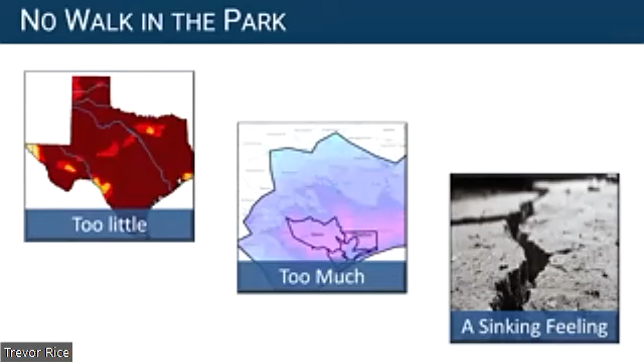Supplies, and then a lot of the state agencies and state programs are already taking the steps to make sure that we're ready to meet that future and meet those water needs. So for a lot of my presentation, I'd like to just highlight a few of the major efforts that are going on in this area.

There are a lot of similar efforts across the state to meet needs in those regions as well, but we do have some specific concerns here.

One of the major planning efforts that goes on here that doesn't go on other places is carried out by the two subsidence districts, the Harris-Galveston Subsidence District and the Fort Bend Subsidence District, to halt subsidence in essentially the greater Houston area, which they've done through a combination of science-driven regulation, but also education and outreach.

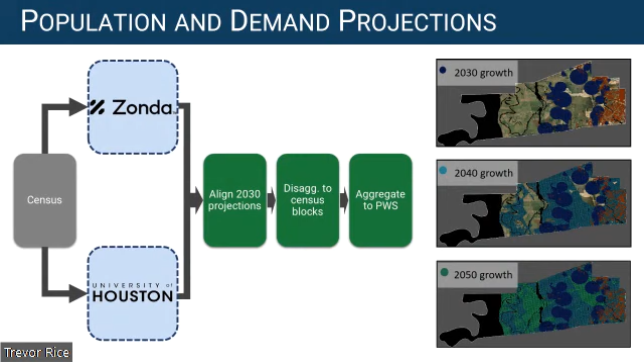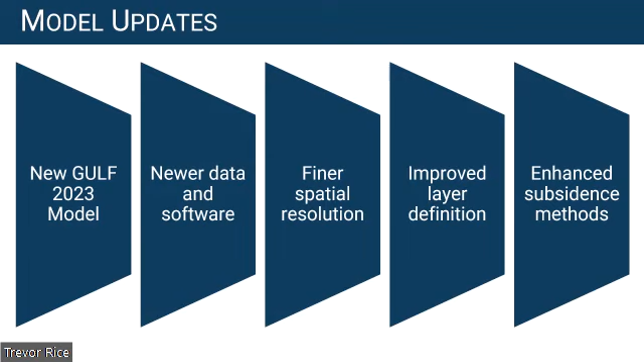And those have already been leveraged by a number of other planning processes in the area. They've also been working to help the long-term planning of this area to update the groundwater models - finer spatial resolution, better definition of the different groundwater layers and the newer science since the last models came out, and enhancing the ability of those models to represent the subsidence impacts of groundwater production.

And from that, they're going to be evaluating different scenarios, looking at how those combinations of supplies, demands, and the groundwater impacts could possibly play out, to see if they need to adjust their regulations, which drives so much of the infrastructure and supply development in this area. And I promise at some point I'm going to quit hitting that pad and bringing that up.

Now, staying on the topic of groundwater for just a moment, in addition to the subsidence districts, this area has a number of groundwater conservation districts that do their individual long-range planning, but they also get together in a state water development board's sponsored process called the groundwater management area process.

In addition to their own long-term planning, they get together and try to look at, from a regional perspective, what are reasonable goals for the future of the aquifers here in terms of things like how much drawdown do we want to allow over the next 50 years, or how much additional subsidence is tolerable over the next 50 years, and look at modeling to see what is a sustainable amount of groundwater production that does not exceed those goals. So that we want to continue using groundwater as a resource where it's appropriate, but we don't want to use it up or sink ourselves into the earth.

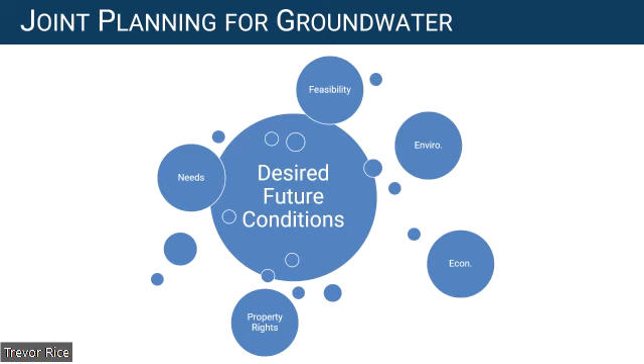So they're doing a lot of work to say, where can we safely go in the future? And both of these processes feed into the state and regional water planning process.

This is a process that came about in roughly 1998, 1999. The first plans came out in 2001 to allow the state water planning process to leverage more of the local knowledge, local expertise. So the state was divided into 16 regions. Each of those regions develops long-range regional plans that look out 50 years, and those are revisited every 5 years because the state's growing fast and it's a moving target.

And fundamentally, this planning process that covers the whole state in these regions is pretty simple. The devil's in the details.

They're 2,400-page reports, but you can summarize the key points in this one little flow chart. You're looking at a repeat of drought of record conditions, a dry year, and asking what would your water demand be? Looking at populations, growth in industry in the future, agriculture, power generation, 40 to 50 years from now, based on that growth, if we were hit by the repeated drought of record, how much water would we need?

And then under similar dry conditions, how much would we have and be able to deliver that day? Combining those two, we're able to identify the projected needs and then start looking at strategies and projects that have been recommended by water providers, by industries, by cities, and then look for where there are gaps and analyze those to make recommendations.

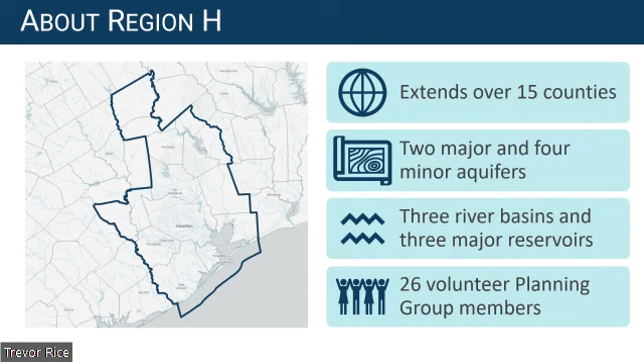The region we're in now along the upper Texas Gulf Coast and the greater Houston area is called Region H, which runs all the way down from Brazoria County up to Madison, Leon counties, and covers all or part of about 15 counties, a couple of aquifers, and parts of the Brazos, San Jacinto, and Trinity River Basin. We're made up of 26 all-volunteer planning group members covering a dozen different interest categories. So it's a very broad perspective.

Now, the latest numbers that just came out about a month ago from the process show the latest water demand projections. You can see it's driven largely by municipal there in blue, and then industrial there in that kind of goldish yellow color. So nothing to sneeze at, 2.5 to about 3 million acre feet.

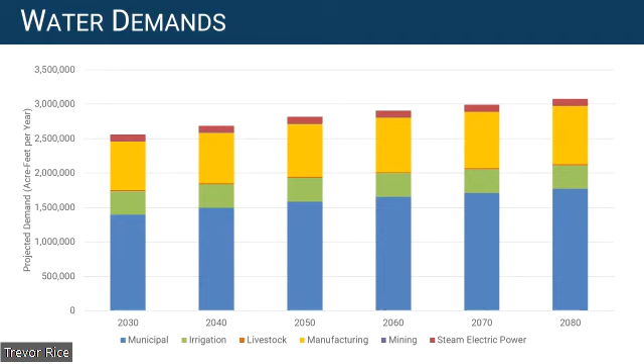And for those that aren't used to working with acre feet, that's 325,851 gallons. It's basically a football field, end zone to end zone, a foot deep.

The other challenge is, even if somebody's got the water, it may not necessarily be where the needs are. So there may be work in the future to develop new projects, to build new pipelines to get it from who has it to who still needs it. So it's not just simply adding and subtracting. There's a lot of looking down at the individual entity level.

And when we make that comparison, we're looking at nearly 400,000 acre feet of need in 2030. Now that grows up to nearly 800,000. Now that's not doom and gloom. And there's a reason in regional planning we say need and not shortage, because it's only a shortage if nobody does anything about it, and a lot of entities are already working on this.

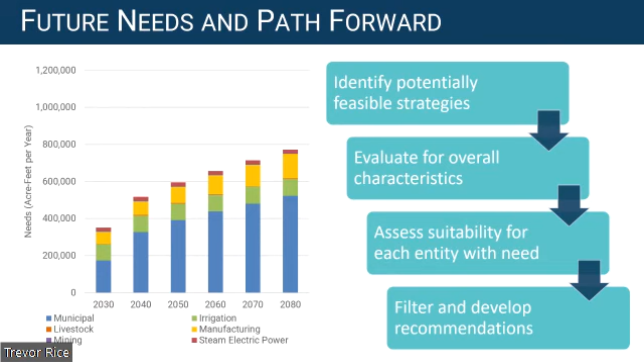So a lot of what you see there in 2030, things are already going in the ground, pipes are going in the ground, people are implementing conservation programs to make that a reality. So it's not as scary as it looks, but it is an indicator that we can't just let things run wild. And so once we have these needs, the planning group looks at those plans that are out there, looks at where there are gaps, and makes recommendations on potential strategies for the future. A lot of those are infrastructure, but not all.

And one thing that the Region H Water Planning Group and a number of planning groups recommend is advanced water conservation and loss reduction. So not all the solutions are structural. Now, conservation and loss mitigation are certainly not free, but when you think about the fact that you're saving water, the equivalent of water treated at the tap versus having to build a reservoir, a river intake, and a treatment plant, and a new pipeline, it certainly is a lot cheaper in comparison to developing something from source to somebody's kitchen sink.

One of the areas that there's a lot of potential that sometimes gets forgotten about is in leakage losses. The Texas Water Development Board collects data every year, surveying systems to figure out how much water they're taking in, how much is getting billed, how much is lost to meter errors, and how much is just getting wasted into the ground.

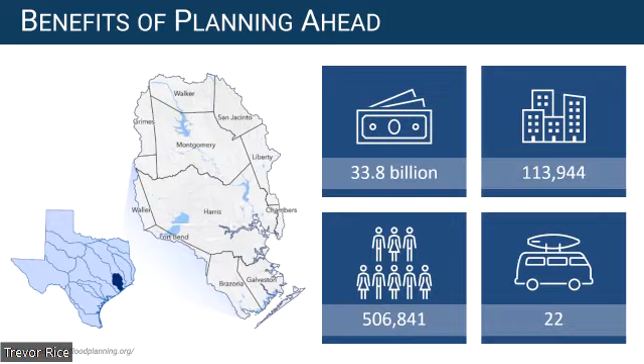Now, one thing that all of the processes I've been talking about have in common is they're all looking out over long windows, typically 30, 40, 50 years. The reason for that is simply that to implement these things, you've got to get out ahead of them. The solutions to a lot of these problems - some can be implemented quickly, some take decades. That's the reason all of these processes that communicate with each other, both in this region, in the state, and the other regions around the state, have to take such a long look.

That can be particularly frustrating at times for industry, because industry is fairly agile and water supply is not. Most providers just cannot move at the speed of industry. They're not trying to be difficult, I promise they're doing the best they can, but they just do not have that kind of agility. So it can be quite frustrating at times for industry to try to procure water supply.

Industry has some other issues that other segments like municipal don't face. Municipal, when it grows, tends to grow with nice smooth curves over time, even when there's booming growth. Industry often is unit-based or facility-based. When you have another demand, you're not building a tenth or a hundredth of the facility each year. You're building a facility—it's there, it's not, and it needs the water.

At the same time, when things get a little tight, it's awful hard when somebody comes to you and says, can you cut your water usage back 3%? It can be on or off—in some cases you can, some cases you can't—but a lot of times things have to be on or off. So industry faces some extra challenges that other demand sectors don't in dealing with supply.

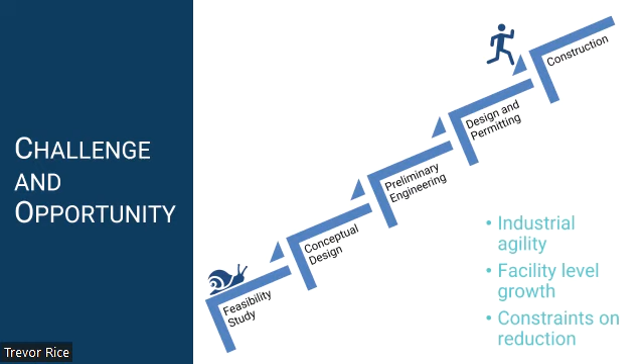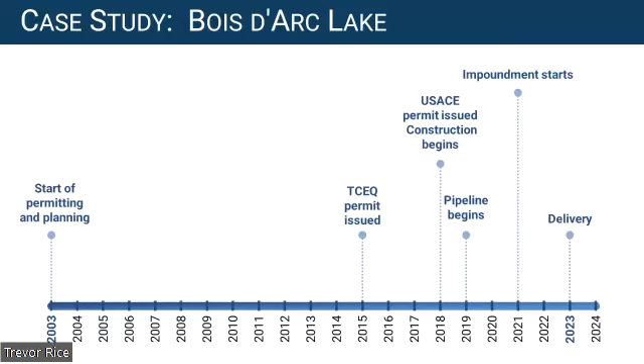When we talk about lead time, a good example—and I know we've got some folks in the room who work in the North Texas area and are familiar with this—is the Bois d'Arc Lake project, the first major reservoir built in Texas in, I believe, decades. Perhaps the fastest modern reservoir we've seen. This was fast-tracked. This was everything going perfectly.

For a major water supply project, everything going perfectly—let me put that in context. When this project started, all the young folk were into this hip new thing called MySpace. When the project started delivering water, we were at the point where we were scared the machines might actually be taking over. That's how long it takes to develop a quick project.

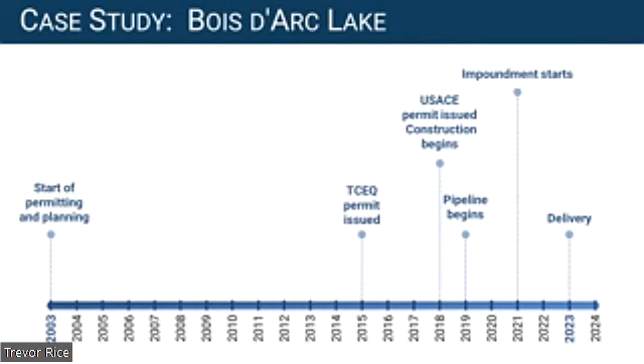That's why all these processes look out so long. One of the advantages this region has had in industrial water supply is that, probably more so than any other region I've seen, industrial entities here communicate with their providers clearly and try to give them lead time. That varies by region, but in this area, the relationship between industrial entities and providers is very close relative to some other areas.

That's been a huge benefit for giving those providers the lead time to get that water there when it's needed. So that ongoing communication will be vital as industry in this area grows—and it's certainly continuing to grow. Whenever there are opportunities for expanded lead times, those certainly help the providers. They understand that for certain industries there are issues of proprietary information, but wherever possible, they need as much lead time as they can get.

Another opportunity out there is that a lot of the processes we've talked about today are very open—they're all public processes, open to stakeholder input from all sectors. In our regional planning group, we have quite a few industrial representatives from different sectors, both on our planning group and in the audience.

That's been super helpful for the region in understanding what the future is for industry, and not just having folks like me—who have a background in ag—trying to guess what the next thing in chemicals is going to be. That's been remarkably helpful for this region, and we highly encourage everyone who can to get involved with that and give their feedback.

There's also sewage overflows that happen from water leaks, and we've had sewage overflows in the Houston area, for example. The leaks do make water more expensive to supply because they're treating that water, or if it's municipal drinking water, they're treating it and then losing it. That's an asset they are not getting reimbursed for. If a water system has expensive supplies they're trying to develop and they're getting more expensive because of those leaks, they also pass that on to the customers, making it more expensive for them as well. So that can be an equity issue too.

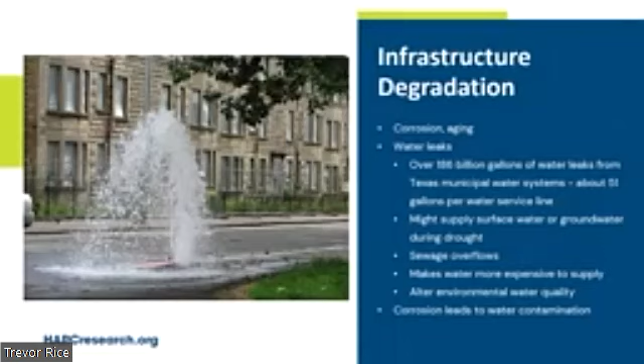And it can also alter environmental quality, regardless of if it's drinking water quality or wastewater. That's a different water quality than what's in the environment, and there could be other things that are in that water, for example, pharmaceuticals or something like that.

Next on our list is water access, and we are thinking of water access as plumbing access. It could also just be the water supply access, water supply issues that were mentioned before.

About 44,000 houses in Texas still lack access to plumbing. That's not a big percentage of the state, but that is a significant need for a lot of people.

There's also insecure access to drinking water and sometimes wastewater services in underserved communities throughout the state. That can be colonias in South Texas or other parts of the state, unincorporated communities, folks in insecure housing situations, folks in mobile homes, folks in rural areas. All of those can have a higher likelihood of having insecure access to water.

It also happens when there's historic disenfranchisement in the area, where folks are less likely to have been, or there's a historic situation where they were not involved in the decision-making for the water system. For example, the lines were drawn to specifically exclude a certain population group or something like that.

This is an issue obviously directly because they don't have access to water, but then it can also push those folks to seek unsafe water sources, bottled water, more expensive water sources, things like that.

We also have drought planning. In the state and regional water plans mentioned before, they're highly encouraged to consider droughts in that plan. The graphic here is from the 2011 drought, and you can see the intensity we experienced in the state from that event. That's not our drought of record though—it's actually a 1950s drought, which was longer and more intense, and that's what's used for water planning now.

In our drought planning we consider drought response, existing water supplies and needs, future water demands, future management strategies and conservation efforts, and financing needs. That's generally what was already described.

There is a public input process within those stakeholder groups. They're not prioritizing certain members of the public—it's the public generally, which from an equity perspective might privilege those who can be part of the process versus those who are most affected by water issues.

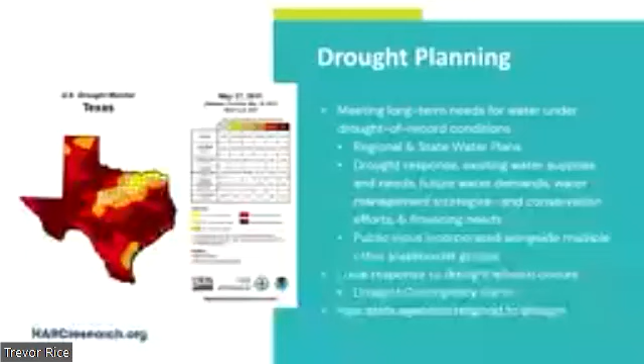There's also local drought planning, drought contingency plans at the local level that do some of this work as well. And then we also have how states respond to drought, with the Texas Division of Emergency Management doing a lot of the legwork there.

We also have flood planning, which was mentioned earlier. We rely on the Federal Emergency Management Agency for flood maps and the National Flood Insurance Program. We rank very highly in flood risk disclosure—one of the top 3 states for that. So another win for Texas. Good job, guys, I assume it was y'all.

We also have the Texas Flood Infrastructure Fund, a funding source attached to the flood planning process mentioned earlier. Projects that are part of that planning process could be funded through the Texas Flood Infrastructure Fund. All of that was a legislative response to Harvey—the Texas legislature put those together after the big event we experienced in 2017.

On the equity side of things, while we have these success stories in flood planning and more recently in flood disclosure, access to information, access to insurance, and access to mitigation and disaster recovery funds is still highly inequitable in who gets that benefit.

On the climate adaptation planning front, we don't have a statewide climate plan. We also effectively don't consider climate in the state water plan process. From the state's perspective, regional plans can consider climate, and quite a lot of them do. Region H does, yes, a little. Region K, the Austin area, is I think the most likely to do that, and San Antonio's area does as well. There's about 5 or 6 of them that do.

Another area we consider in our paper is transboundary waters—the Rio Grande that separates Texas from Mexico. There's a 1944 water treaty governing that river, where Mexico must deliver 350,000 acre feet—a football field one foot deep—on a 5-year water cycle. It used to be that this often happened during floods, when they had a lot of water and we would get that extra water. We do allow for a water debt during drought, and Mexico has been unable to fulfill that debt or reach the needed supply with us 3 times since 1992.

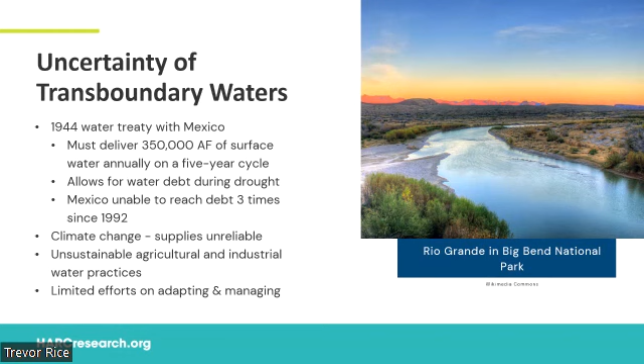That treaty was obviously written in 1944, and then, as I mentioned before, we had a water rights adjudication process on that river because it is so stressed. Climate change since then has also made supplies very unreliable, so we do have drought and flood to deal with. The process does make it relatively unsustainable for agricultural and industrial water practices on that river to be able to predict the supplies they're going to have to do the processes and practices that they have. There's also limited efforts on adapting and managing water on the river as well.

So we consider some challenges and opportunities in sustainability and equity. These are major sustainability efforts that are already underway, and we're evaluating how they incorporate or don't incorporate equity in their water management.

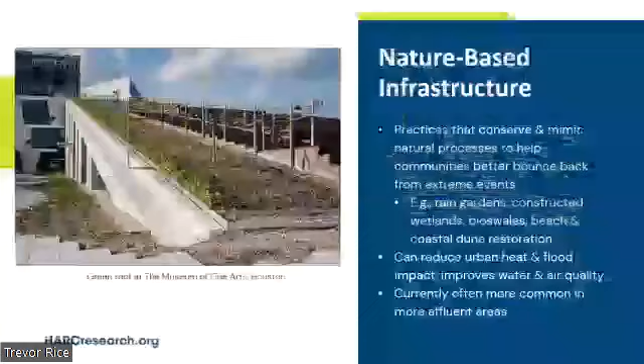The first is nature-based infrastructure, and this would be practices that conserve or copy how natural processes already do the work of water quality restoration or flood mitigation. So taking that process and copying it, making it work for a community. It can be used for resilience to help communities better bounce back from extreme events.

Examples of that would be the green roof at the Museum of Fine Arts in Houston, but also rain gardens, constructed wetlands, bioswales, beaches and coastal dune restoration, lots of different examples of how that's used in practice. The great thing about these nature-based solutions is that they can help reduce urban heat, help with air quality, help with water quality, help reduce flooding. There's a lot of co-benefits with these practices. They also tend to be relatively nice looking because they're greenery and it's nice to have that around.

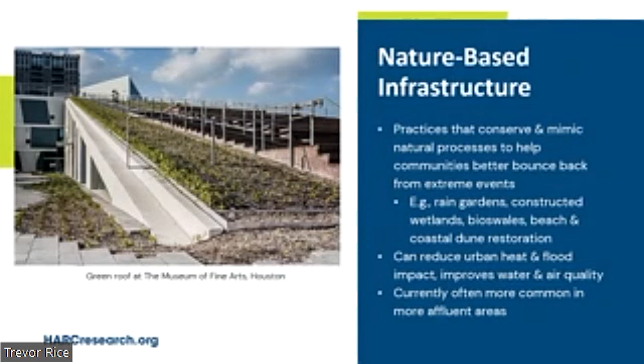However, they're also more commonly applied in more affluent communities. We'll see less of that in underserved areas, which contributes to the things I've mentioned before, where we have more flooding issues in those areas, poorer drainage, water quality issues, things like that. So that's a challenge to this practice, that we often see it in more affluent areas, an opportunity being all of the co-benefits that it does provide and being able to apply it in more areas of Houston, the Harris County area, Region H, and Texas broadly.

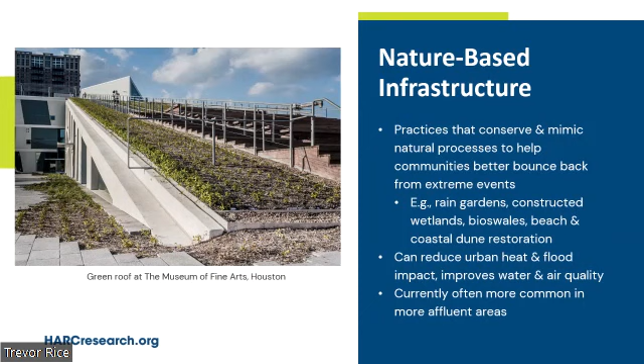We also look at One Water, which is a philosophy that all water has value, and we can think of it all together. It's not drinking water and wastewater and surface water and groundwater, it's one water. Stormwater, seawater, any of those things. It also accounts for water quantity and quality together. It's a unified planning process, ideally for long-term resilience, because you are thinking of all of those things together.

There are communities that are already considering this, for example, Austin or New Braunfels. There is an emphasis on engaging a wide variety of stakeholders in that process, including people from underserved communities. That is an opportunity for this. A challenge being, it's still a challenge to make sure that they are included, that they are engaged, and they are prioritized in water planning processes, especially when they're impacted by decisions.

So our recommendations from this process are that there should be equity in spending government funds at the local, regional, state, and federal level. For example, in the federal process, there's currently a Justice 40 mandate, for the Infrastructure Investment and Jobs Act and the Inflation Reduction Act. Justice 40, just for reference, is a requirement that 40% of the benefits of that government spending flow to disadvantaged communities. The definition of what counts as a benefit is still up in the air, but it's at least a movement towards trying to make sure that the folks who have been historically left out of planning processes, infrastructure investment, or the benefits from new projects, for example, hydrogen that's been mentioned a few times, those folks are actually receiving a benefit from those activities.

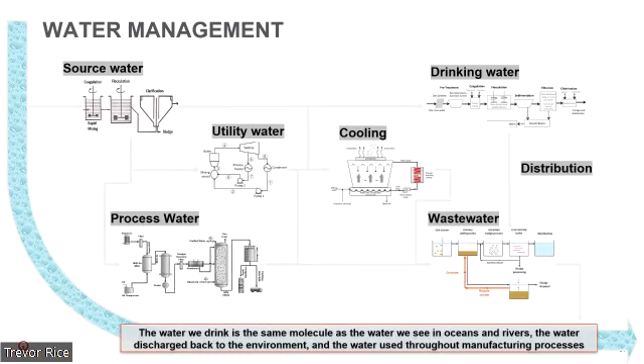So the two big things I want you to take away, if you stop listening now, is, alright, that water must be fit for purpose. What is that purpose, and how do we understand what the quality goals are and how we can get to that? Because the technologies are available to do that treatment, the technologies are available to do that measurement, but we need to have that target available so we know what we're working towards.

And then that other thing is, okay, we have those tools so that now we can set those targets. We can set our KPIs for efficiency, for compliance, for quality, and by having that data, we can then use that to drive our decisions.

So we say all of that with things changing, and we have various challenges. We've got a slew of climate challenges, from flooding to drought. We might have good quality, so then what do we do with things like new regulations, contaminants? Just because we can measure it, do we know that effect on human health and the environment? How do we quantify that?

How do we enable things like reclaim and reuse and recycling of that? How do we have better desal opportunities? It's there, it's available, but it hasn't really taken off yet because of the costs. And then how do we make sure that our wastewater discharge is of the quality that it should be to not affect the environment, and then the next person that's taking that water out further down the river?

We have all of that with a shift in market. We have shifting workforce—COVID's affected a lot. We have different generations coming in that have different expectations, even of what work means to them. All the while, we're still managing supply chain constraints and starting to steady out a little bit there, but in our business some people have gone out of business, or some markets are just higher than they were before, some parts aren't available to access.

So I've got a couple examples now of what a refinery water balance might look like, what a chemical water balance might look like, and then we'll get into how we affect regulations and sustainability. But here's just a couple ways. There are all these different water uses at a plant, and all these different water discharges, of different qualities.

If we have certain treatment and the location is right, maybe we can repurpose this discharge to actually use for one of the water uses, or one of our purposes used. We say that because we look at these numbers at the bottom. Some of this research I mentioned is from Bluefield Research, a really good source for what's happening in different water markets. We use a significant amount of water, and we discharge a significant amount of water.

I'm not going to get too deep into the numbers here, but we use more water than we make of product, and that's pretty consistent across industries. We also have water that we take in as our initial makeup water, and the majority, at least of our refineries here, are using surface water.

That surface water quality can be variable. In some cases we might be taking water in from a river that is worse quality than we are required to put back out into that river. That's an uneven situation for a plant to have. So if that plant could then, instead of discharging water of a better degree than they got it, reuse that for purpose inside the plant, maybe they could reduce the intake water they were previously required to take. This opens up the idea of how could we reuse that?

Some places are obviously using that through a steam system, different ways of reusing whatever that wastewater is, stormwater, rainwater here, correct, in Colorado, but how can we take those and then repurpose them?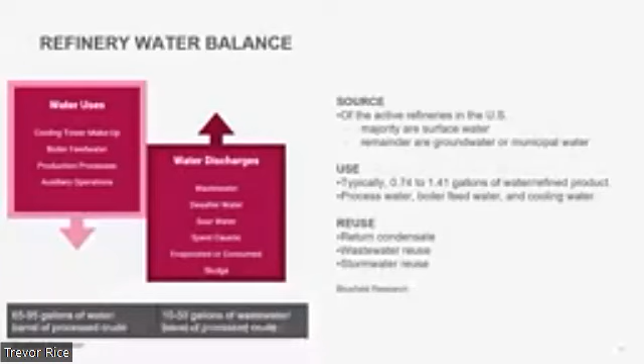Looking at it slightly differently, from a chemical plant side, we might have some different wastewater discharges. We also might have different water uses, perhaps more in the product itself, or within production processes.

Overall, if we look at the chemical industry, we know that organic chemicals are the most water intensive to make, ag chemicals are typically the least, and in between you use different sets of water. But that water spend isn't only the intake, it's also the recirculation, it's acquiring that water, where we're getting it, and then how much it costs us to even discharge that water back.

Right now we're in a scenario where water use and water management isn't a top priority. Even when we think about improvements, chemical plants are often more concerned about energy discharge, air emissions, and even plastics. So right now we're at an opportunity where we can start to think about planning and improving for the future and having water be a part of that, because it's not only from a brand reputation, but it's cost savings and process improvements that we could gain from that.

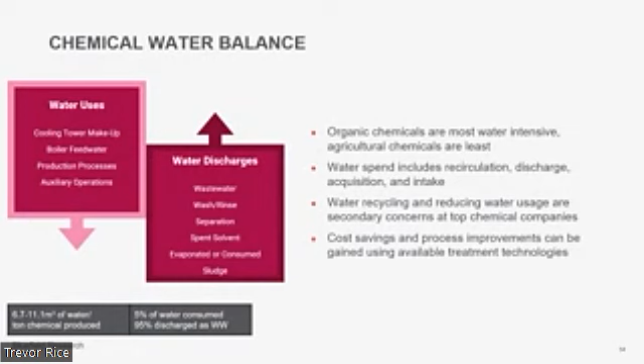So looking at the regulatory side, a lot of this is around discharge compliance. Just doing a quick Google search, I found very easily several headlines that pop up. So this isn't only an effect on possible degradation of the environment, it's degradation to the brand, it's additional costs, it's fines.

And so the thought behind this is if we are able to improve our discharge compliance, and then also get it to a point where instead of discharging that water, we can use it, now we know the quality is good, and we can avoid this kind of publicity and press. We can make sure that whatever we do discharge is going to improve the environment for the next person that's going to pull out of it.

When we think about the discharge, we've got a series of parameters that we've got to hit according to whatever NPDES permit we're looking at. Number one is probably looking at those toxic pollutants. How is that going to affect the environment? How could that affect human health? And then looking at nutrients, so your carbon, your nitrogen, your phosphates that can then degrade that environment itself.

But then also think about that water source. Eventually, that water molecule is going to become an intake to a drinking water source. So it's all tied together. And the more that we can improve that, the better we can not only comply with those limits, but we can improve the performance as well.

But then we think about, okay, well, that could be expensive to improve that treatment. It's often considered a cost center, whereas we can easily get funding for production process improvements, things within the plant, because that's usually what produces profit at the plant.

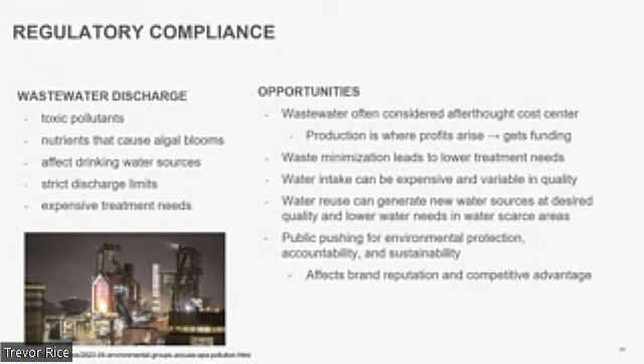So thinking now about, okay, how can we use reuse? We can possibly generate new ways of sourcing that throughout the facility and start to look at it from, okay, reducing our regulatory compliance issues, but maybe improving brand, improving that competitive advantage. If we're not one of these names, then that improves the business overall.

So then transitioning that into, okay, now we've got a lot of facilities looking at making and publishing their own sustainability goals. And through some research, it tends to be that more B2C customers or companies publish more of their water use and their water management plans than B2B. So we see a lot in like food and beverage, pharmaceutical, they publish a whole list of what they're doing from a sustainability standpoint. A little bit less on like power, mining, and some chemicals if they're going to another business.

But being Veolia and coming from a French company, I recently saw this corporate sustainability reporting directive. And so this is going to affect not only facilities and companies within France, but over 50,000 companies, even those outside of the EU. And all they're looking for right now is to report social and environmental risks. So every company is going to start to being required to do this. And well, this type of thing might not come to Texas, it might not come to US, at least companies that are multinational companies might have to start to record a lot of this information.

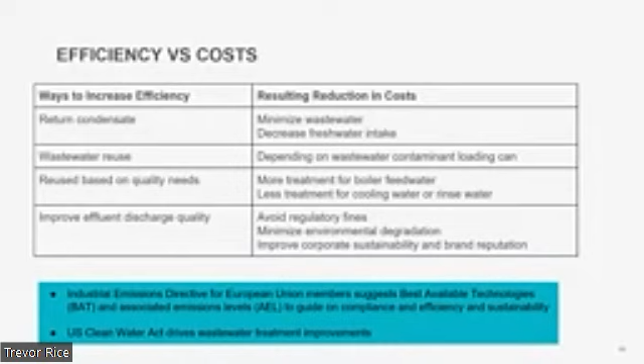So last bit on efficiency and opportunities from wastewater before we move on to how process monitoring can help: I was at an event recently in Colorado, an innovative water technology seminar, and most of the people there were talking about recovery of wastewater and what we could do with that.

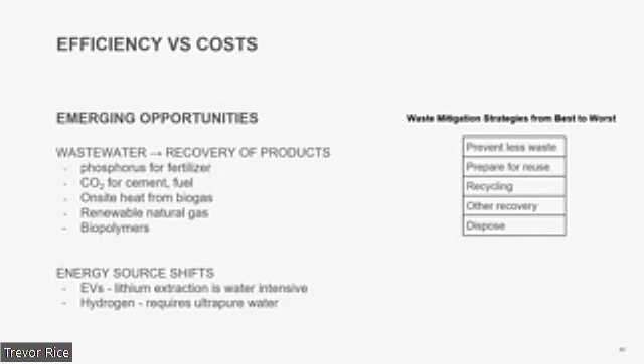Some of the ideas I noted down here: either capturing phosphorus from our wastewater, using the CO2 from say some anaerobic processes to make different kinds of cement, different kinds of fuel, using that as some kind of input, using that on-site heat maybe from biogas, or even making biopolymers from some of that wastewater we've got. So there's a recovery of products market from wastewater that we could gain.

And then we have to think about some of the questions from the first talk: how are these energy sources going to shift in terms of our water use? I thought those were really great questions. We know that hydrogen, at least right now, the technologies require very ultra pure water. How much energy, how much water go into making that versus what are we going to get in return? I think those are all really good questions.

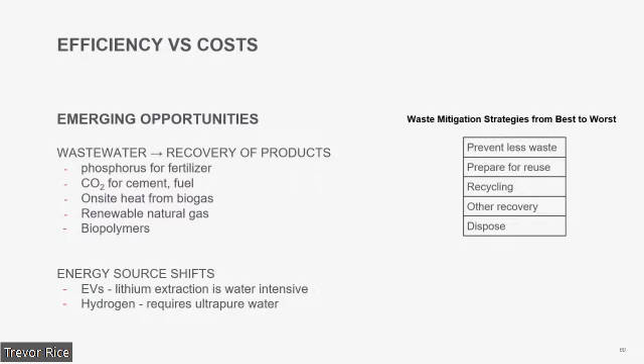But in general, the best way to mitigate our waste and our wastewater is to make less waste and then prepare for how we can reuse it. Think about how we could recycle it or recover it in other ways, with disposal being the least optimal case. But how do we really use this?

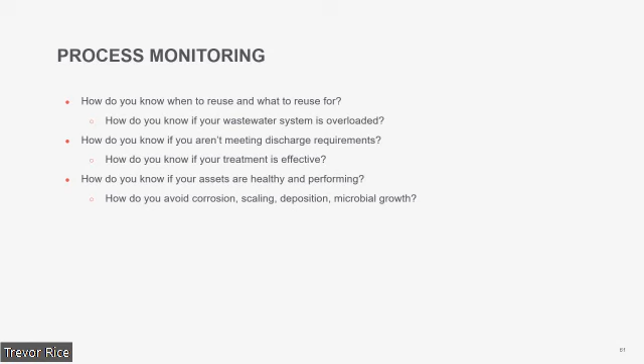Well, process monitoring comes into play when we want to ask these kinds of questions. Let's say we want to treat this water to some use. How do we know if it's good enough for that use? How do we know if the treatment's working? How do we know if the wastewater system is overloaded? How do we know if we're discharging in compliance? All these things are great questions that can be answered through better monitoring.

In the past, it's been very standard to just monitor at the point of exit and say, am I in compliance or am I not? Maybe those were done with a grab sample sent off, and we didn't really know for a couple of weeks. But now it tends to be shifting towards knowing what is coming to the wastewater at the beginning, because that's going to shift a lot, especially in industry.

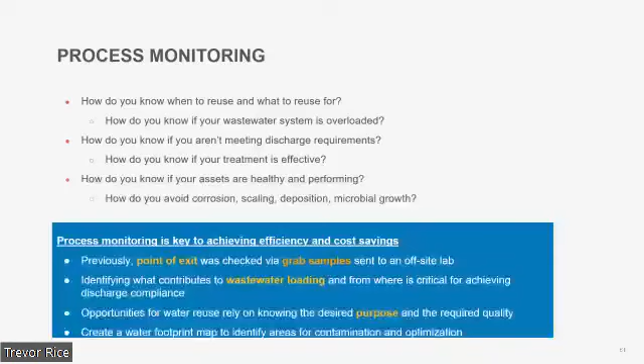Using continuous monitoring, knowing what your major contaminant's going to be, looking at that before it even goes to treatment, and then afterwards gives you an idea of how well that treatment is working and if you're removing as much as you should be based on the treatment that's there. So there's opportunity to use this water quality data and process monitoring to hit those desired purposes.

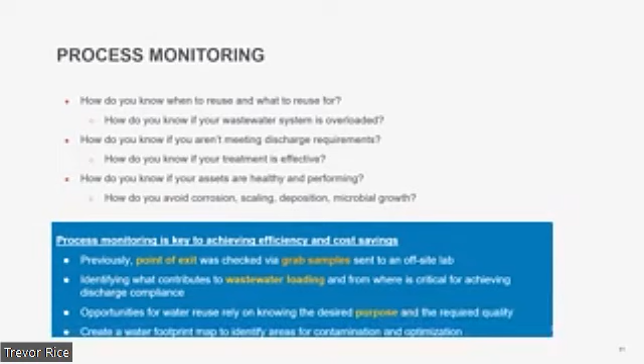And the way I like to think about that is, okay, start from a map and identify where those tough areas of contamination might be, or where there's areas where you could start to optimize. In general, when we think about process monitoring, it's three main steps. We're not talking lab tests and very high analytical perfect accuracy.

We're looking to really understand a trend. But first, to understand a trend, we need to know what the baseline is. So what does good mean? And good can be different based on a plant. Even within the same company, you could have different locations with different quality baselines for that water. So first it's good to know, if everything's running smooth, what do we want to be at? Then from there, how do we detect a change from that, because that's what could alert us if we can't use it for one of these other purposes.

And then when we have that data, we have to be able to use it to take action. We don't just want all the water quality data forever for data that's not useful. We want the data that's going to help us make those decisions and then be confident in those decisions.

Some examples of when we don't understand our water quality, or we have poor water quality: you could have premature replacement of equipment, poor heat transfer so you're not as efficient, effects like scaling, microbial growth, or corrosion, all leading to higher operating costs from degraded water quality. You could even have equipment completely fail.

We also need to take into account where that water's coming in. That could change over time, or we could be downstream of somebody else that discharged something out of compliance and we didn't know, and now that affects everything inside the plant.

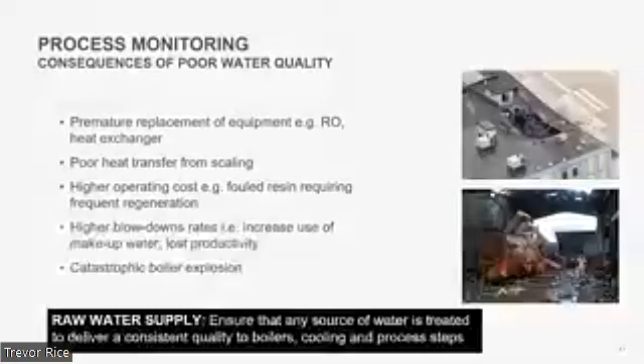But things to think about when adding monitoring are things like speed, safety — obviously you don't want to be carrying hazardous reagents for an analytical tool into a plant, that doesn't work out well — and what range is important, how high or how low your contaminants are going. Identifying those key points helps you identify what the right tool is.

And it's not just the tool itself, it's how the tool performs over time. Hopefully you have this tool for 10, 15 years, and you don't want it to fail after one year, or require a lot of maintenance. It should be useful — that's the goal of this. It shouldn't be another pain point.

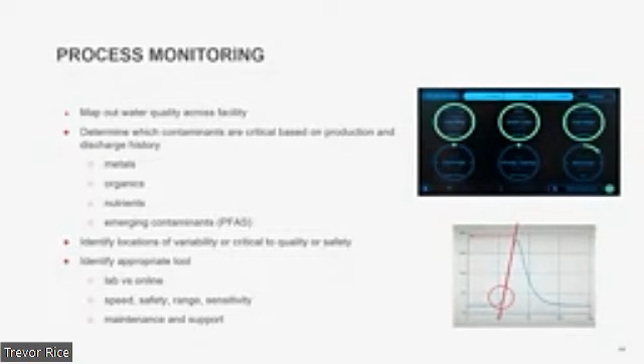So to summarize, and I guess I ran through that quickly — we want to think about water management, how we could reuse, and how monitoring can help with that. We've talked about how better water management can help us improve discharge compliance, achieve our sustainability goals, enable reuse, ideally minimize waste, and lessen our freshwater intake.

But in addition, if we're at a plant making lots of different products or running multiple batches, by monitoring those rinse-down cycles or monitoring the product itself, we can try to prevent contamination and prevent having to throw away whole batches because something gets contaminated. And ideally, if we're looking at cleaning out equipment, maybe we can reduce cleaning cycles or chemical use.

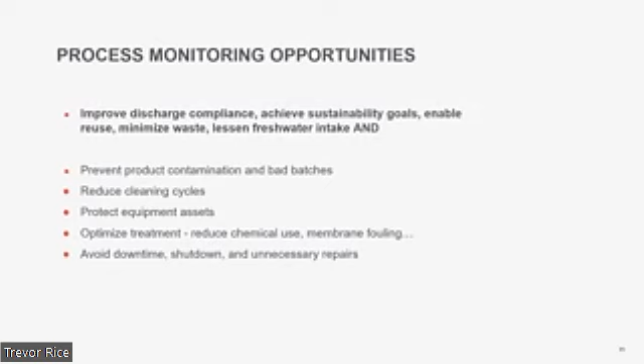We have this treatment equipment and we want to protect it and use it to its fullest, but if we're sending bad water that's going to foul membranes, then we're not using those membranes as effectively as we should. So there are other opportunities that can be gained from this kind of water management and understanding water quality and how it can be reused.

So to summarize, and I guess we'll leave some extra time here — we're facing challenges with regulations, with climate, with sustainability pushes, all while trying to manage costs and maintain competitive and profitable operations. We've got opportunities to improve efficiency and save costs through better water management.

The only way I can really see to use that water for different purposes is knowing what water quality target you have to hit. And the only way to do that is through process monitoring, to understand what that quality is, give you better control, and then give you the confidence that you're in compliance. So it brings about that awareness so you're making data-driven decisions.

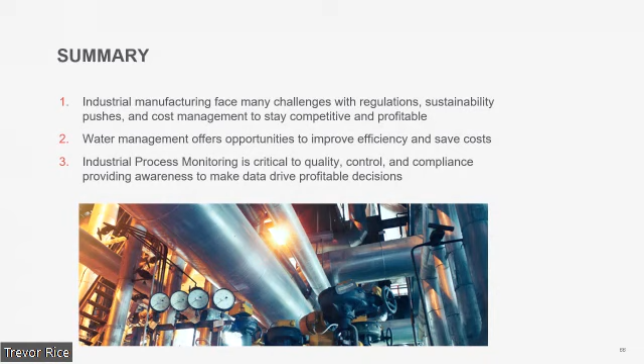Hi, Amanda. Thanks. It was a great presentation.

You talked about monitoring and control, and a lot of the concepts were kind of inside the fence line. What do you do if you have bad water quality, or how do you keep bad water quality from getting outside the fence? And you talked about matching water quality, like you don't need more, or somebody might take your bad water and really use it. Is there an agency or an initiative on a macro scale where people do matchmaking, saying you've got a facility here that's 10 miles away from an industrial facility, and you could link them up if you knew it? Who's trying to put the two things together to make it the most efficient? Is there anything going on like that?

That's a really good question. There might be, I don't know if I'm too aware of any. What I have heard is I was reading something yesterday about the food and beverage industry starting to think about reuse. They don't have standards, they don't know what critical control points they need. So there's a group of people from the water industry, from the reuse regulatory standpoint, from food and beverage companies, and even people higher up within government that are trying to get together and see if they can put some of these guidelines together. Because that fit is so important, or else you're wasting time, money, and energy.